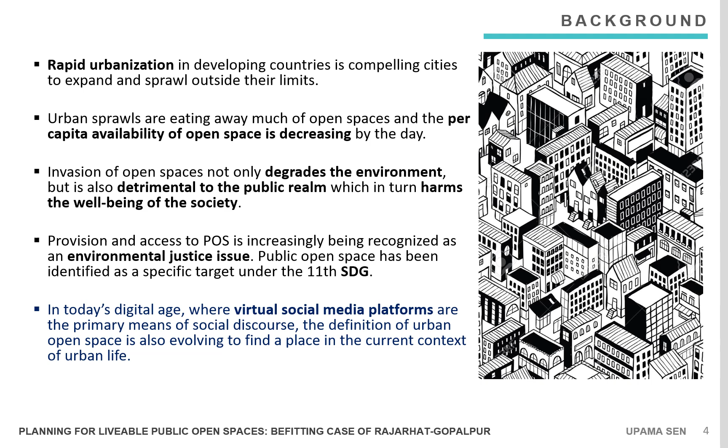Cities are sprawling outside their limits due to rapid urbanization. The per capita availability of open space is decreasing by day. This is detrimental to the environment and public realm and is an environmental justice issue. Most Indian cities have developed organically, and informality is evident even in its open spaces. Studies on open spaces mostly apply on Western formalized ones. There is a growing interest in measuring livability in the built urban environment.

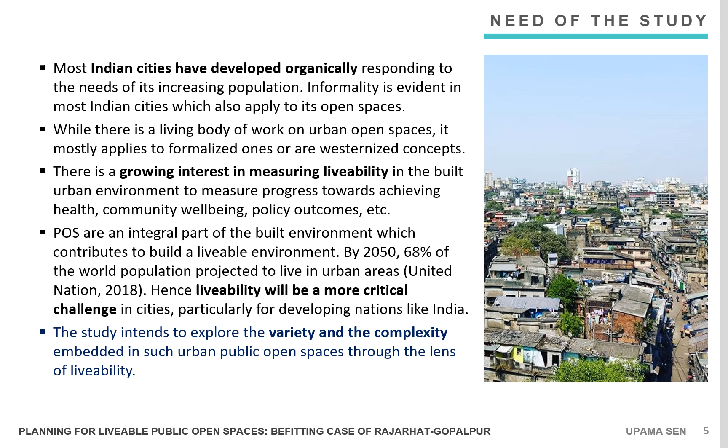The aim of the thesis is to study the dynamics of public open spaces and approach in formulating a toolkit of features and scoring index to earmark livable public open spaces befitting the case of Rajarhat Gopalpur.

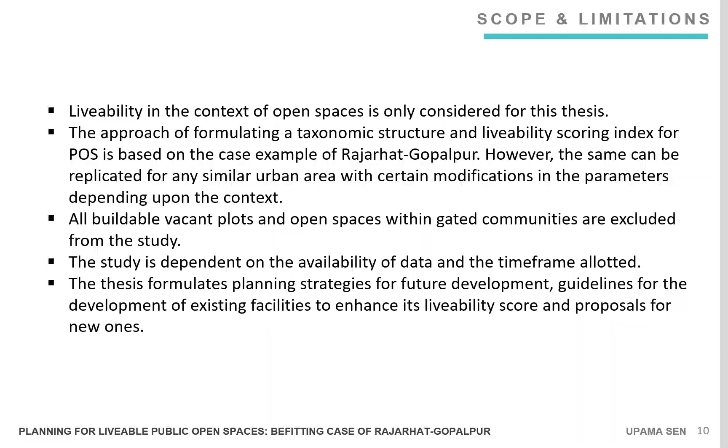A public open space is a publicly managed open area, both green or hard space, that does not contain permanent built structures and is accessible for public use.

It provides opportunities to socialize and recreate, promotes social inclusion, generates community cohesion, nourishes physical and mental health. It redresses urban heat island effect, incorporates nature and wildlife in the urban fabric, tackles issues like urban regeneration, and contributes to disaster management.

The quality of POS can be classified into visual quality that leads to imageability and has a direct impact on the user's experience, physical quality that contributes to its usability, and spiritual quality that improves cognitive characteristics in users. The characteristics of POS are accessibility, safety, engagement, identity, comfort, multifunctionality, and inclusiveness.

Usability of POS can be described by user and activity. Activity can be necessary, optional, or social.

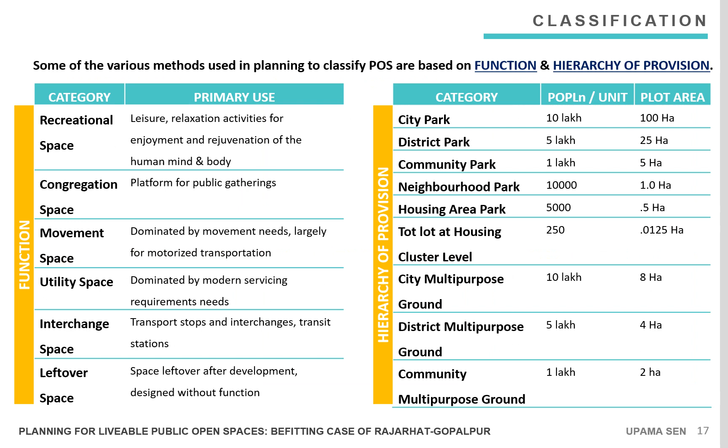The value of POS can be measured in terms of economic value, crime reduction, environment, health and well-being, play and recreation, and social dimension. There are various ways to classify public open space.

Historically, public open spaces have been the nucleus of social, cultural, and political life. Over time, the form and function of these open spaces have evolved, but they have retained a host of similar characteristics. Livability of public open space can be defined as the quality of the place that contributes to the latent quality of life. Public open space is identified under certain sustainable development goals.

The following cases have been studied. Superkilen in Copenhagen is an example of the transformation of a neighborhood from a scary, unsafe place into an attraction point in the world.

Manek Chowk is an urban public space that is experiencing deterioration of public life and needs planning intervention. Rabindra Sarobar in Kolkata acts as the green lungs of the city and serves as a recreation space for citizens.

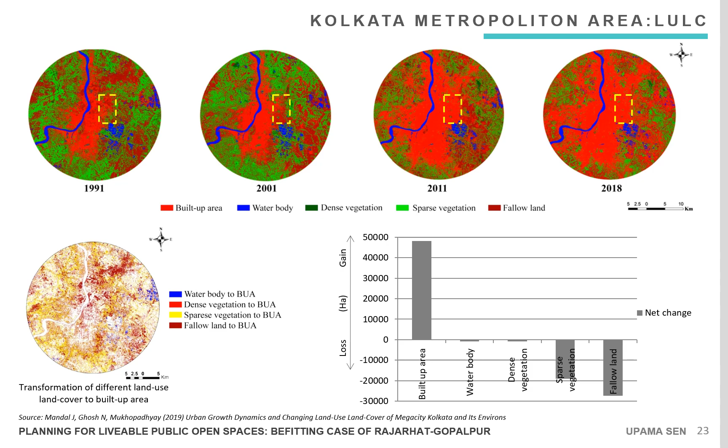The broader focus area of the study is the peri-urban region of Kolkata, which has been narrowed down to Rajarhat Gopalpur, a locality under the Bidhannagar Municipal Corporation in North 24 Parganas, West Bengal. It was previously administered under the Rajarhat Gopalpur municipality. The region has seen a huge spurt in real estate development over the past decades.

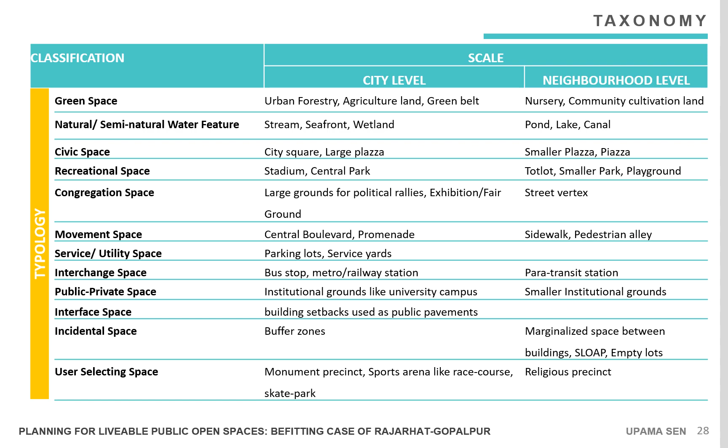The scoring index is developed based on 7 criteria. Each criteria has a set of indicators which have a positive or negative impact on the metrics. To score a POS, each indicator is assigned a respective value. As these values are expressed in different units, they are normalized by the dimensional index methodology.

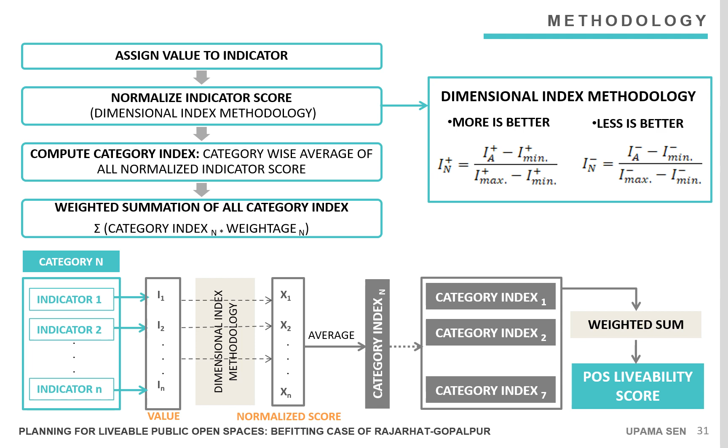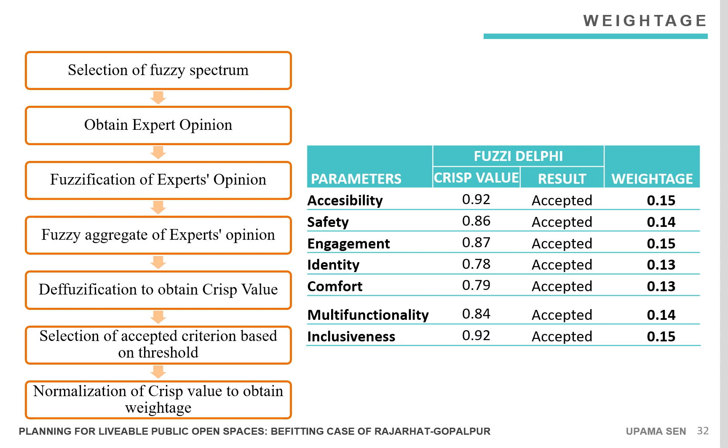The category index is then computed by the category-wise averaging of normalized indicator scores. The weighted summation of all the category indices produces the POS livability score. Weightage for the criteria are obtained from the expert opinion survey using Fuzzy Delphi. A 5-point fuzzy spectrum is selected, based on which opinions from a panel of 10 experts is obtained.

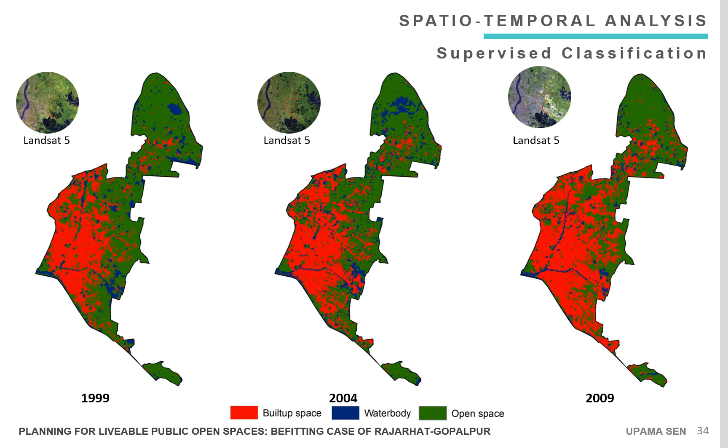Satellite imagery obtained by remote sensing is analyzed to observe the spatiotemporal change. The land cover is studied at an interval of 5 years over a period of 20 years from 1999 to 2019 using supervised classification. The temporal land cover variation over the last 2 decades indicates that the urban area has increased by over 100% and green spaces have decreased by over 50%.

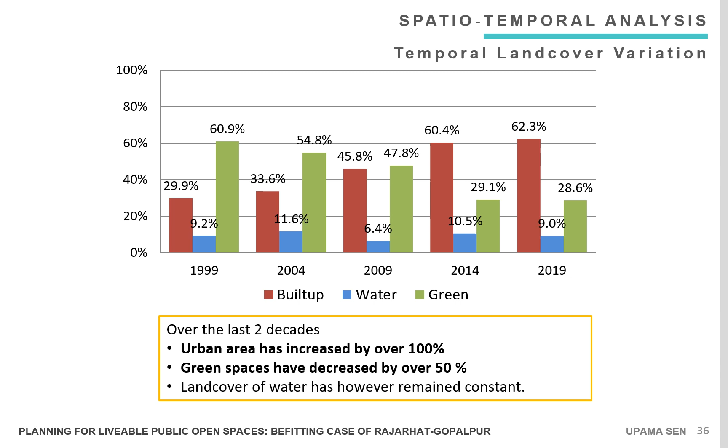The reliability of the supervised classification is tested by confidence testing and kappa coefficient. The existing land use is compared to that of Salt Lake, which is a planned area juxtaposed to Rajarhat Gopalpur, to find the gaps in land use in the study area.

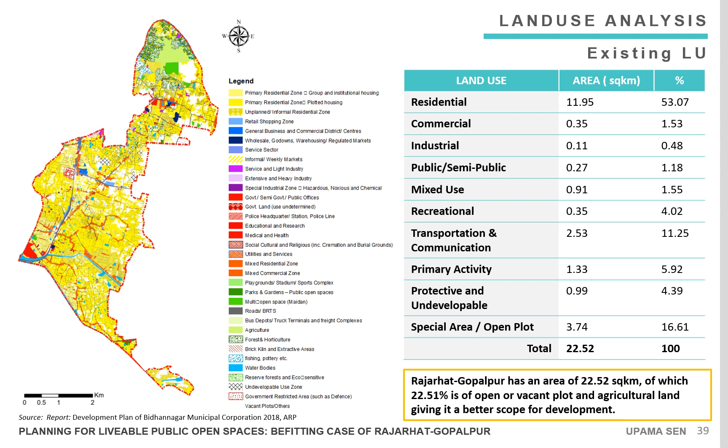Analysis of existing land use indicates that Rajarhat Gopalpur has 22% of open or vacant land and agricultural land, which gives it a better scope for development. Rajarhat Gopalpur has a population within 1 to 5 lakh and is therefore analogous to medium town 2 as per URDPFI.

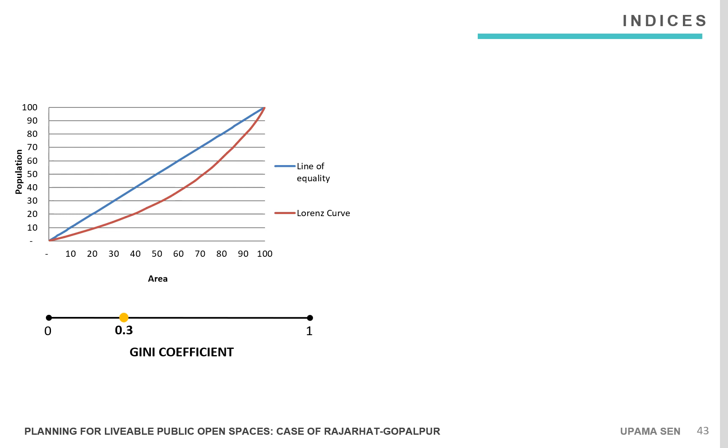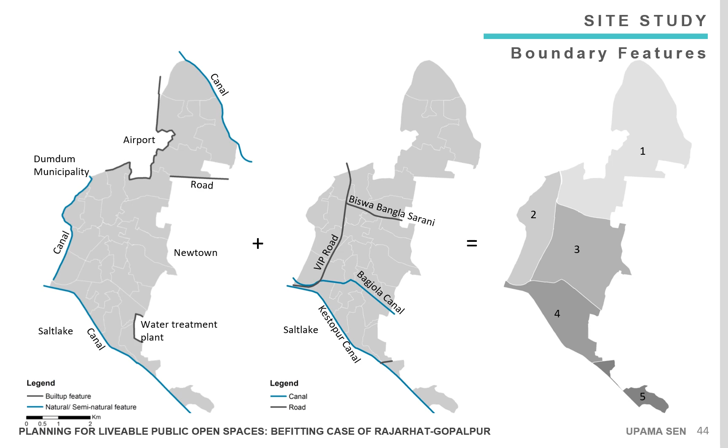For a detailed site study, the study area is divided into 5 smaller regions based on boundary features and edge conditions. Region 1 is currently experiencing rapid development and hence would pose greater demand for POS in future.

Region 2 has adequate POS facilities. With no or very few vacant land, it does not see further densification. In Region 3, the dense pockets have a high demand for POS. The less dense wards are seeing rapid densification, which is depleting its open spaces.

Region 4 is bounded by canals, which require development to function as good POS. In Region 5, the growth trends pose threat of densification and it would demand POS in the near future.

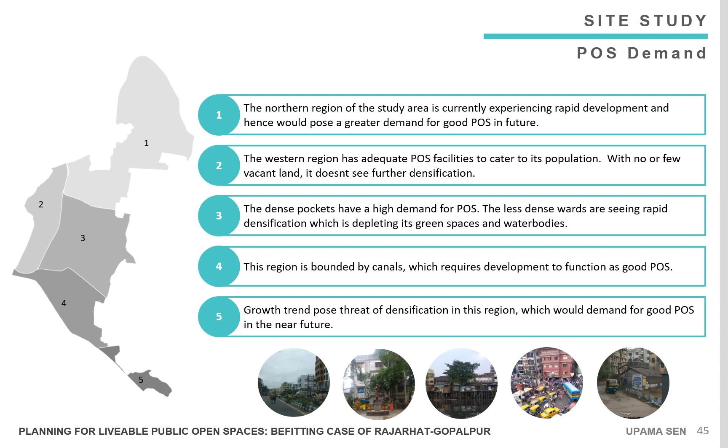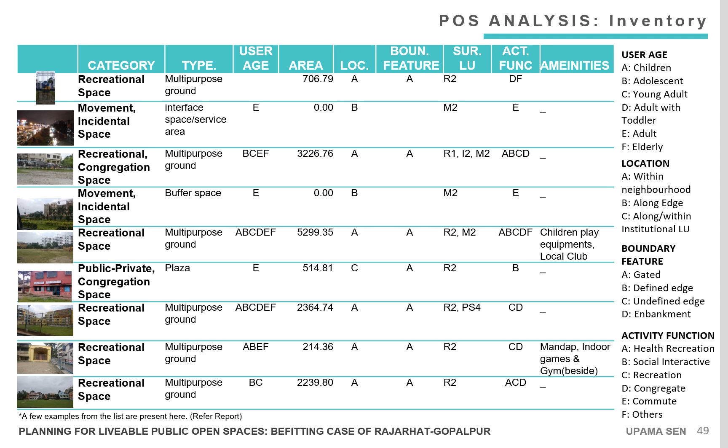Visuals of the existing POS facilities in the study area are geotagged as shown. An inventory is created with certain attributes of POS. Quantitative analysis shows the number and area of POS as per typology. Detailed analysis of certain POS is conducted.

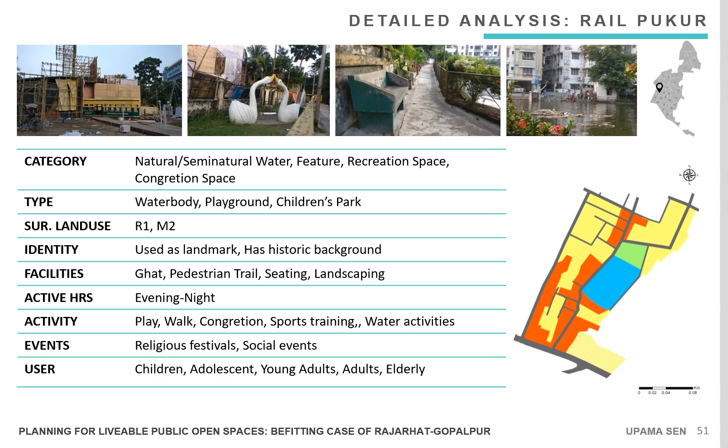Rail Pukur is a water body with a ground and a children's park in a fairly residential neighborhood. It has a historical background and is referred to as a landmark in its locality. This shows the layout and section of Rail Pukur. The activity in the POS is mapped on a weekday evening.

An user satisfaction survey based on different parameters is conducted with 10 different users. The overall satisfaction score is 3.77 with a standard deviation of 0.38.

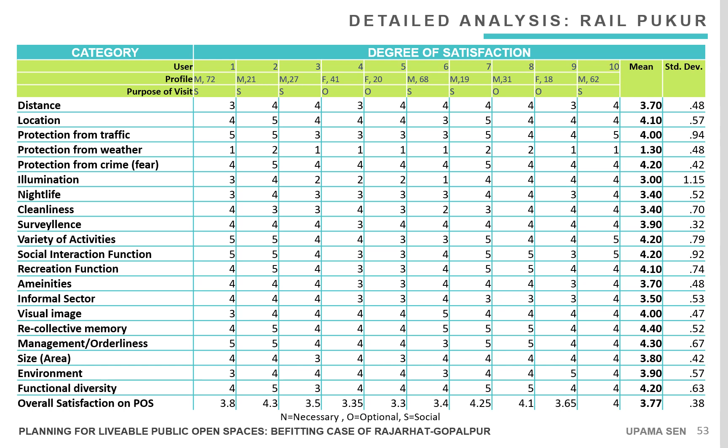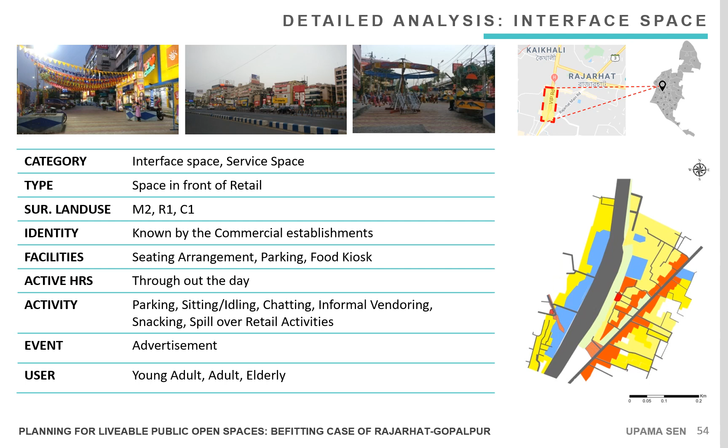The interface space along the VIP road is known by its adjacent commercial establishments. It is active throughout the day with various activities engaging different users. It serves as a recreational, congregation and service space. Activity in the POS is mapped during day and evening on a weekday.

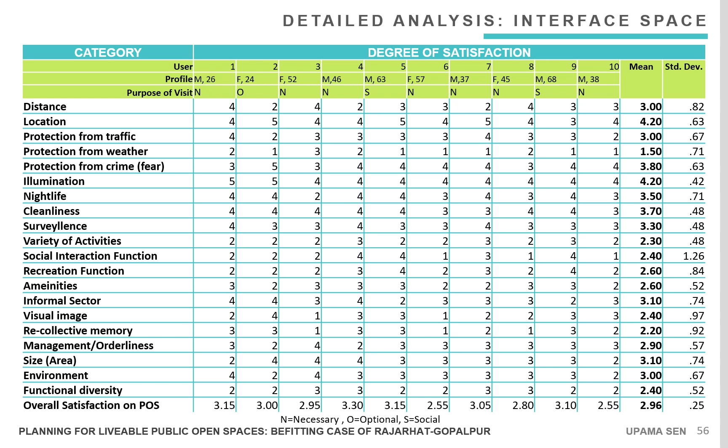The overall user satisfaction score is 2.96 with a standard deviation of 0.25. Survey indicates that despite 55% people having access to POS, 50% of them never actively use it. The degree of social interaction is high, which infers that POS are not the sites of social interaction. Focus group discussion states that this is due to the lack of quality of POS.

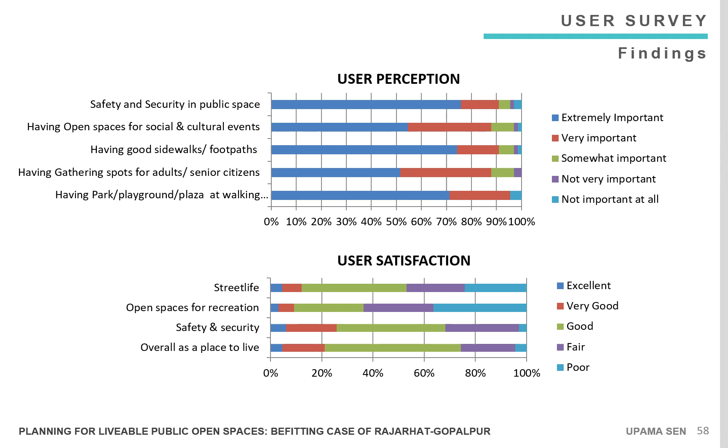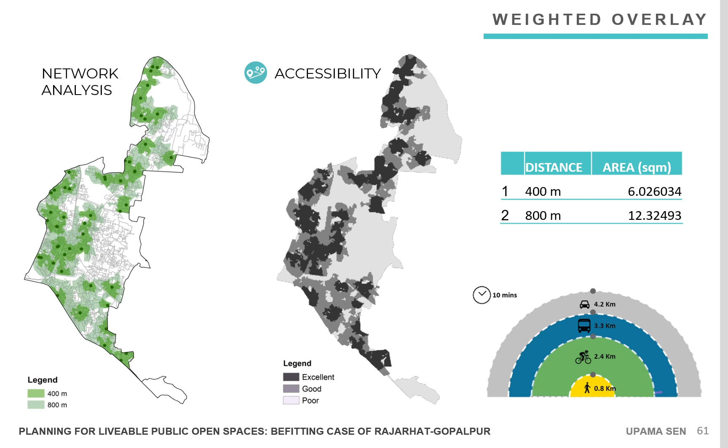Network analysis is used to map the service area of POS along the road network. This is translated to map accessibility. The other criteria of safety, engagement, identity, and comfort, multifunctionality, and inclusiveness is mapped by qualitative analysis. The spatial representation of the parameters are overlaid with respective weights as mentioned in the scoring index. This produces a map indicating hotspots in the study area.

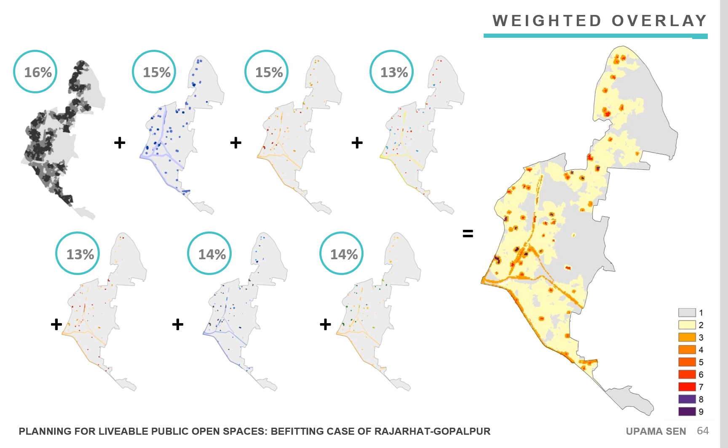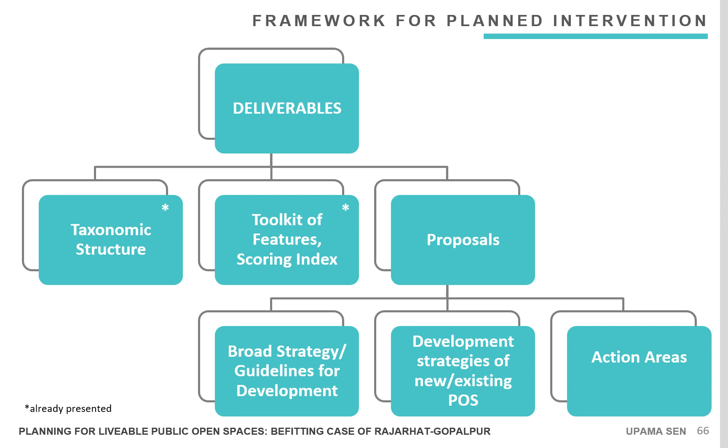9 indicates the highest POS score. Based on the study, planned intervention is proposed in the form of broad strategies for development, for new and existing POS, and action areas.

The broad level strategies are as follows. Design strategies include urban branding, redesign, development, and upgradation of POS. Fiscal strategies include forming partnerships, levying user charges in certain POS, betterment tax, seeking advertisement and sponsorship.

Maintenance strategies include volunteer training programs, awareness generation, non-labor intensive waste management, surveillance, and native species for landscape. Management strategies include maintenance of a digital database for POS. Stakeholder strategies include partnership, involvement in planning process, and sense of ownership in stakeholders. User participation strategies are directed to attract footfall.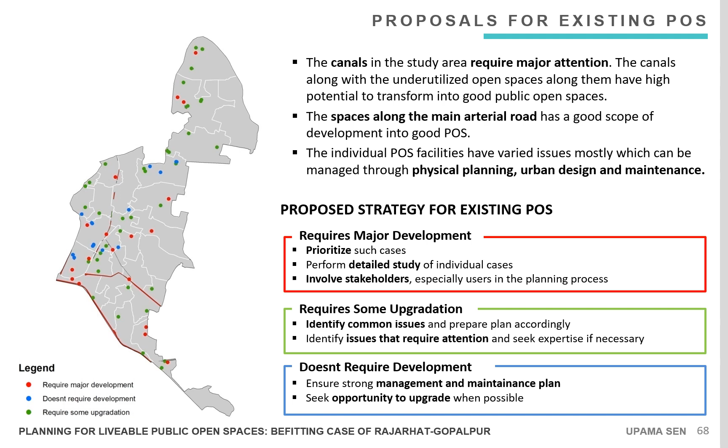Based on weighted overlay analysis, the existing POS are categorized into groups that require major intervention, minor intervention, and no intervention at all.

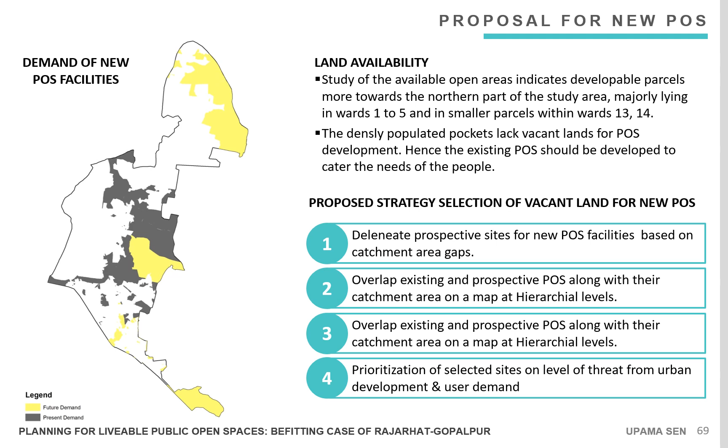Development strategies for each category is recommended as shown. There is an evident need for POS in certain regions as mapped. Study shows availability of open developable parcels in certain areas. The strategies for selection of vacant lands for new POS are proposed here.

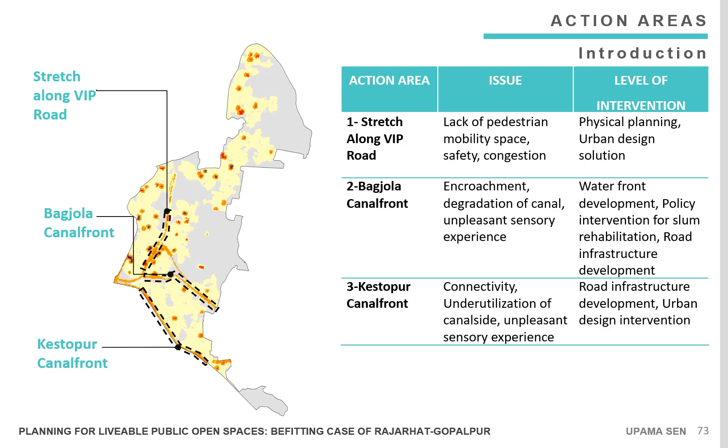These are the proposals for new POS and their tentative locations. A city-level park is proposed in the northern part of the study area. The ward-wise proposals are stated here. Action areas are selected from the assessed hotspots from the weighted overlay analysis.

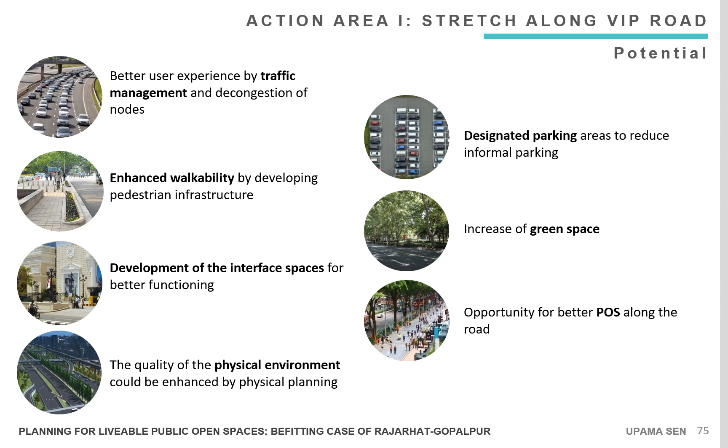Action Area 1 is the stretch along VIP Road. It has huge potential and can serve better to its users by necessary interventions. The goal is to develop a seamless interface space along the road, facilitating commercial and recreational activities.

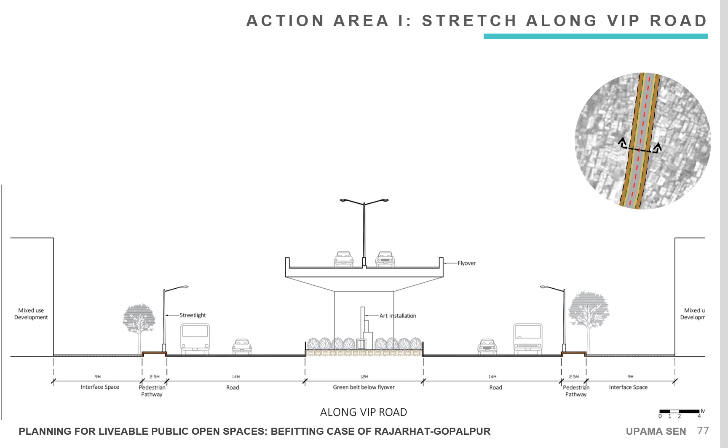The section shows designated area for pedestrian pathway and interface space. Land use planning strategies propose commercial and mixed-use development along the stretch with mandatory 2.5-meter wide pavement and interface space. Transportation strategies propose dedicated lanes and parking spaces. Physical infrastructure proposes a waste collection system and street lights at 15 meters center to center for illumination.

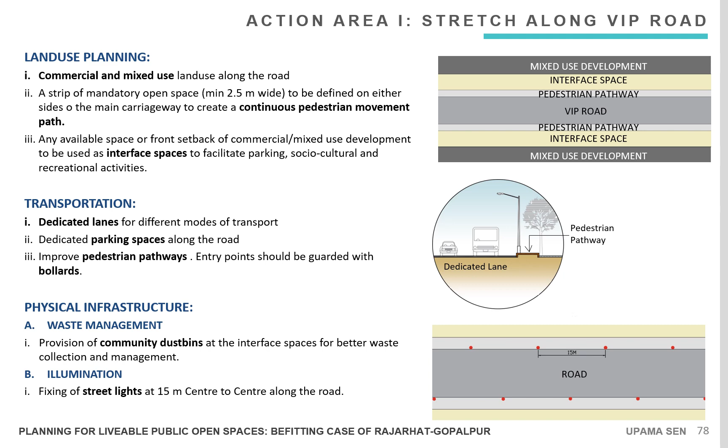Urban design strategies mention different typology of trees for landscaping and permeability for pavement. It also states guidelines for coherent building signage, street furniture, etc.

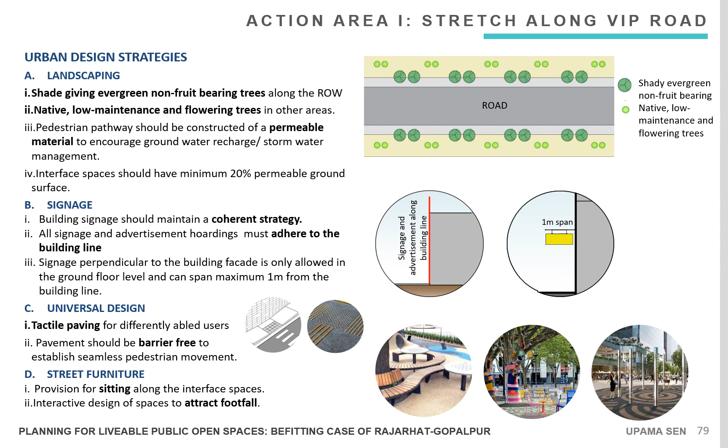Action Area 2 is the Bagjola Canal Front. The area can be developed as a waterfront development with recreational areas, green spaces, organized vending zones, etc. This would enhance the real estate value in the region.

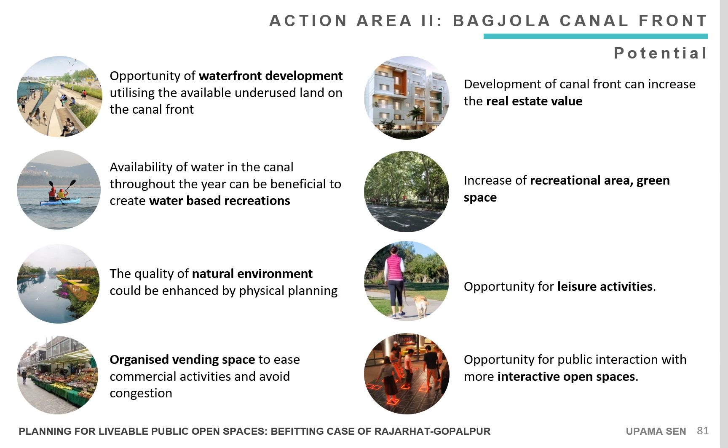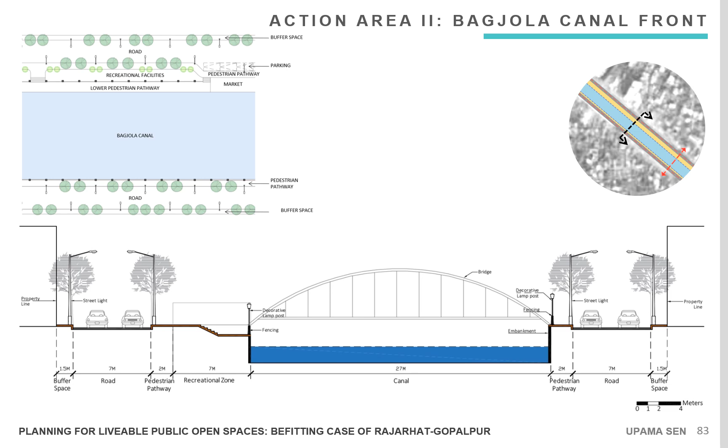The goal is to develop the underutilized canal front to function as a public open space. The section shows the plan for the canal front development with road network on either side. Land use planning strategies propose development of public spaces, rehabilitation of slums, and relocation of encroached shops.

Road infrastructure to be developed on either side of the canal with one-way traffic flow to ease circulation. Bridges to improve connectivity between both sides. Waste management strategies restrict disposal of waste in the canal and propose proper waste collection.

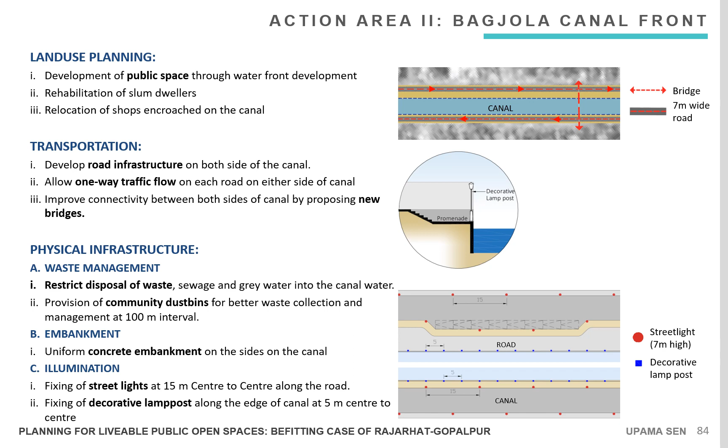The canal edges to be concreted for embankment, street lights at 15 meters center to center along the road, and decorative lights at 5 meters center to center along the canal is proposed for illumination. Urban design includes strategies for fencing, landscape, etc.

Two typologies of fencing are proposed and must be coherent along the entire stretch. Landscape includes shade-giving, evergreen, non-fruit-bearing trees along the road and native low-maintenance and flowering trees in other areas.

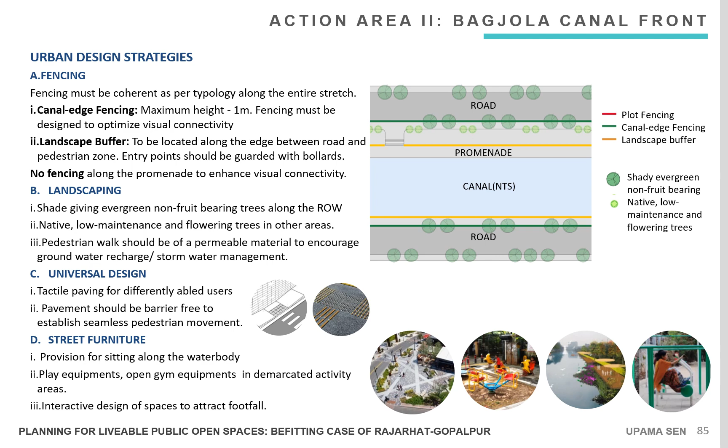Action Area 3 is the Kestopur Canal Front. It can be developed to increase connectivity between two regions along with development of the canal front. The goal is to enhance connectivity between two regions and build a character of the place.

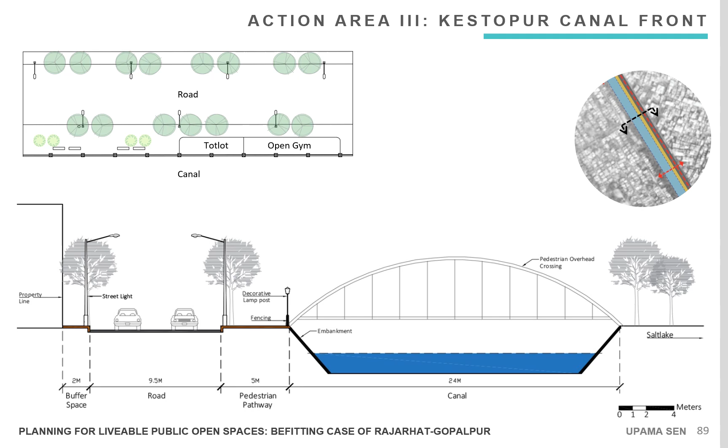The plan shows the conceptual development strategy. The section shows designated areas for pavement, road, location for light fixtures, and fencing. Proposed development strategies are similar to the previous case with certain additions and modifications.

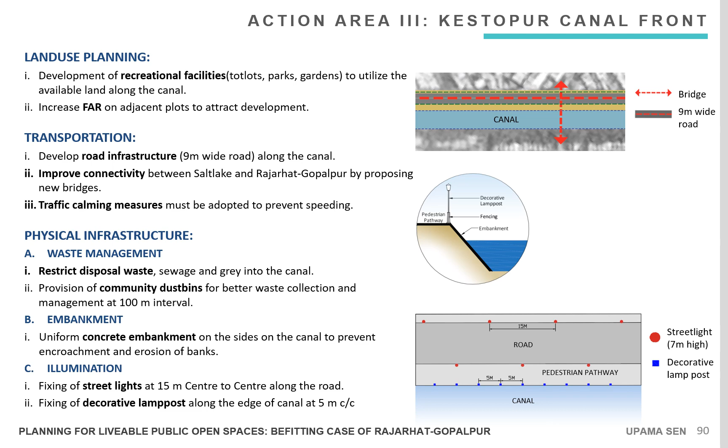Land use strategies propose increased FAR to attract development. Traffic calming measures are to be adopted. Three typologies of fencing are proposed. Landscape and street furniture strategies are, however, similar.

Proposals are divided into two phases for efficient planning and functioning. Here we come to the end of the presentation. Thank you.